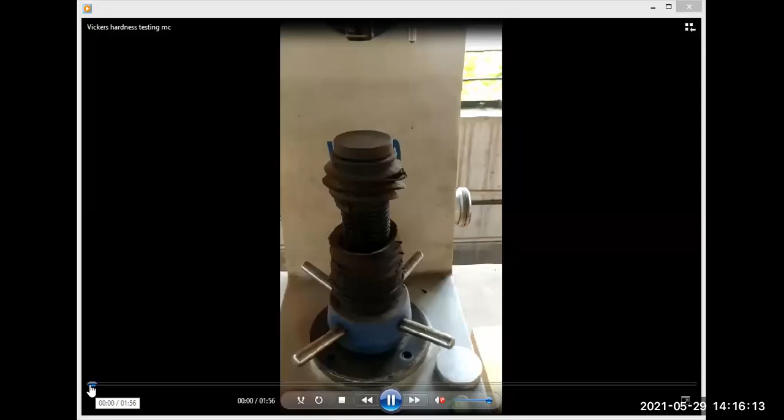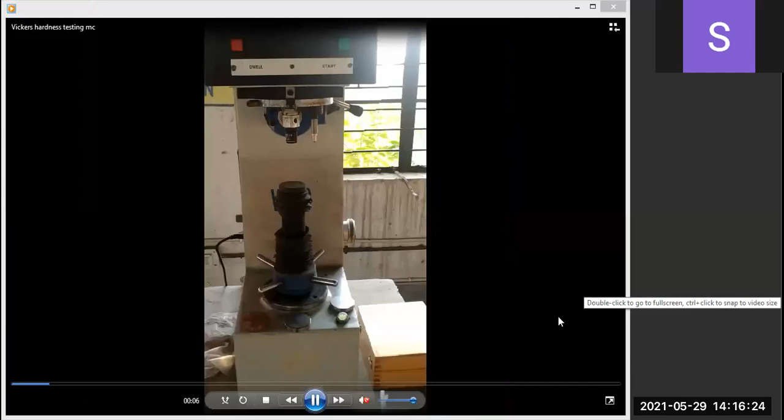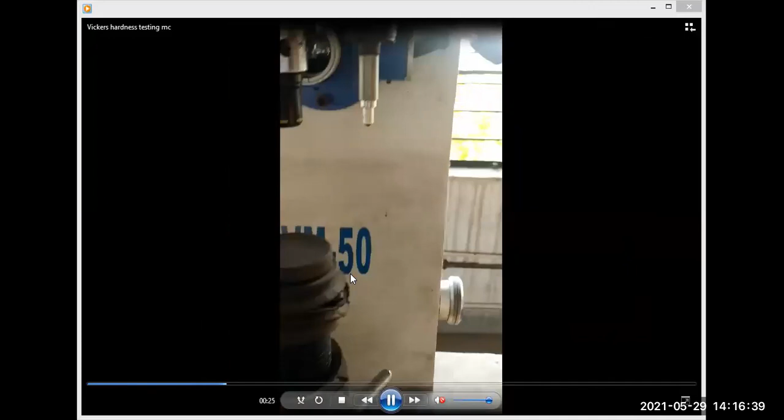Now this is our Vicker's hardness testing machine. There is a lot of similarity with the other Rockwell and Brinell hardness testing machines. Here we have the same screw jack system for lifting up and down of the platform, and this is the platform where you are supposed to keep your workpiece for hardness testing.

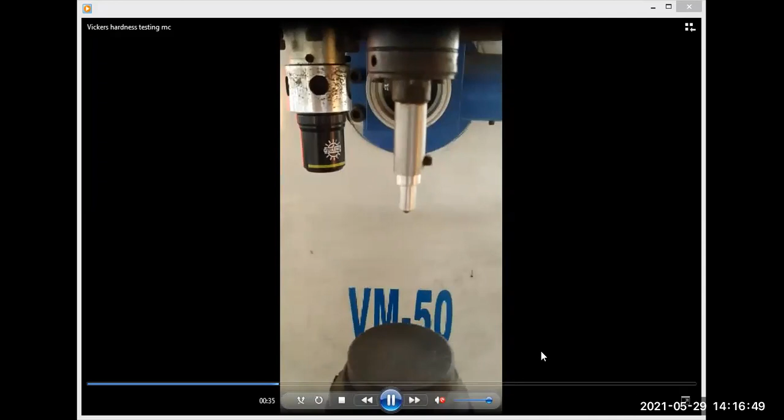Now there are other equipment here. There is a magnifying glass here, which makes 10 times magnification. And there is another magnifying glass inside the machine which totally magnifies the impression and shows it on the table itself.

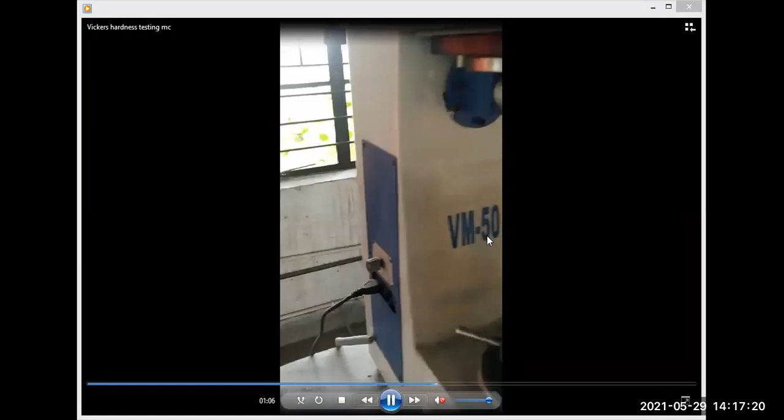The indenters are fixed here in the right side plunger, and it can be moved by a clockwise rotation so the indenter can be brought over the workpiece. This is a time setting device which sets the time of engagement of the indenter inside the work. This is the on/off switch, and this is the cable plug, because it is a power-driven machine.

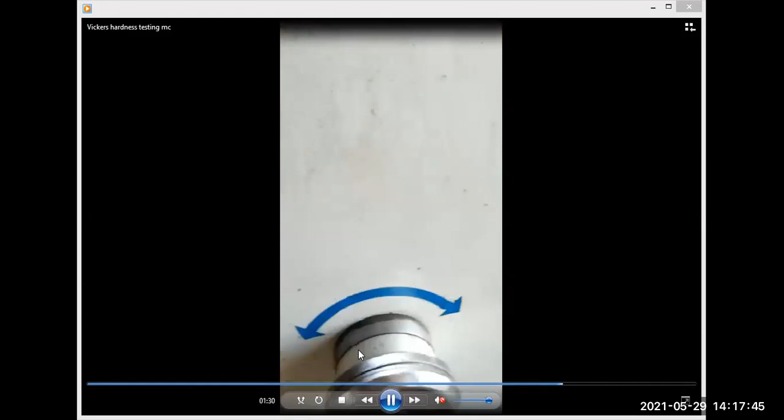On this side we have the load adjustment knob. Here we can start from load 5 kg, next 10, 20, 30, and 50 kg. So 5 to 50 kg are the different loads we can set on the Vicker's hardness testing machine.

Let us show it again. This is the platform over which we will place our workpiece. This is the screw jack system. By rotating this handle clockwise and anti-clockwise, you can lift the platform. If you rotate in the anti-clockwise direction, the platform goes up, and it will go down when you rotate in the clockwise direction.

This is supposed to be covered by rubber bellows to protect it from dust, but unfortunately it is torn out now. This is the indenter holding device, here an indenter is held and fixed over it.

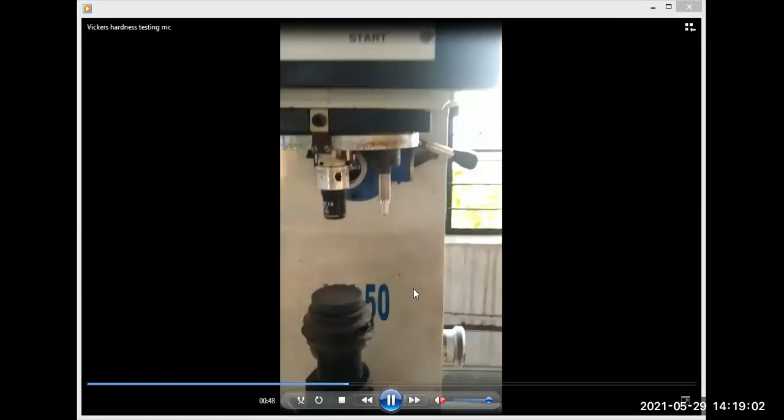This is the magnifying glass which is fixed by rotation and magnifies 1 is to 10 the impression of the work. Inside that window there is another magnifying glass, so altogether it gives 1 is to 100 times magnification of the impression, which is shown in the window and can be measured over the scale kept inside the window.

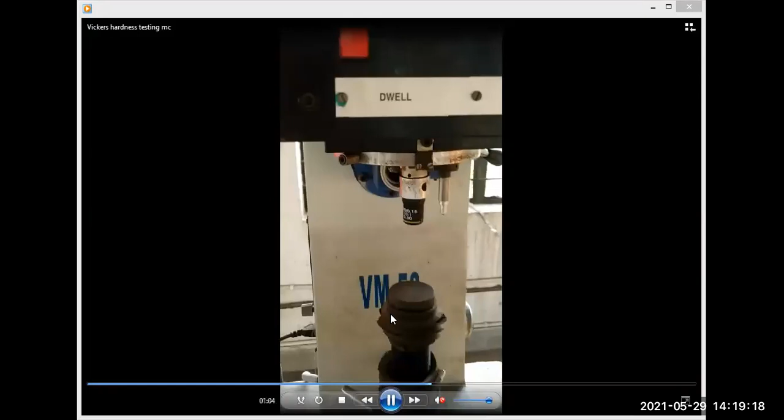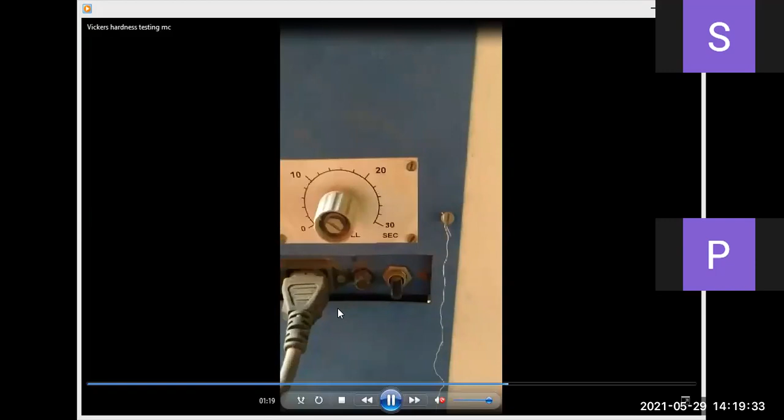On this side we have a time actuating device with a timer for holding the indenter inside the workpiece. This is the on/off switch, and this is the power plug, because this hardness tester is a power driven machine.

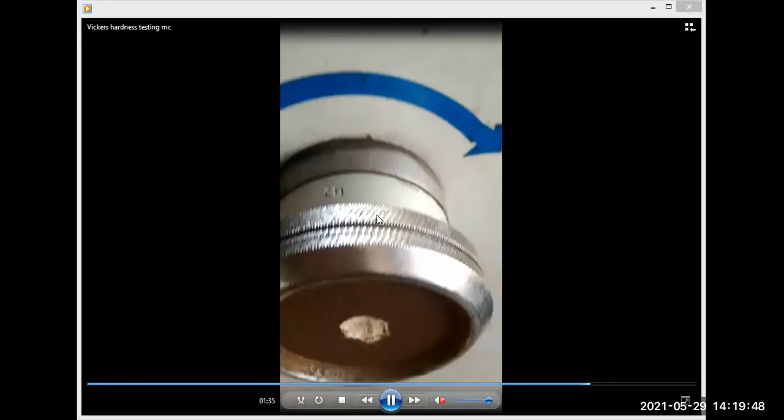On the other side of the machine we have the knob for load actuation. We have around 5 different loads we can set: one is 5 kg, then 10, 20, 30, and altogether 50. These different loads are selected for your experiment, and the job can be set accordingly.

Let us show it again. This is the base and foundation of the machine over which it is situated. It is just fixed and kept on the bed, not actually fixed with the bed itself, and it should be perfectly horizontal with the bed.

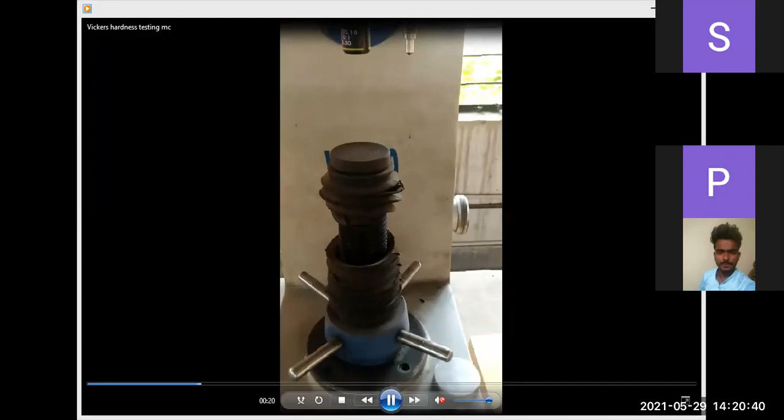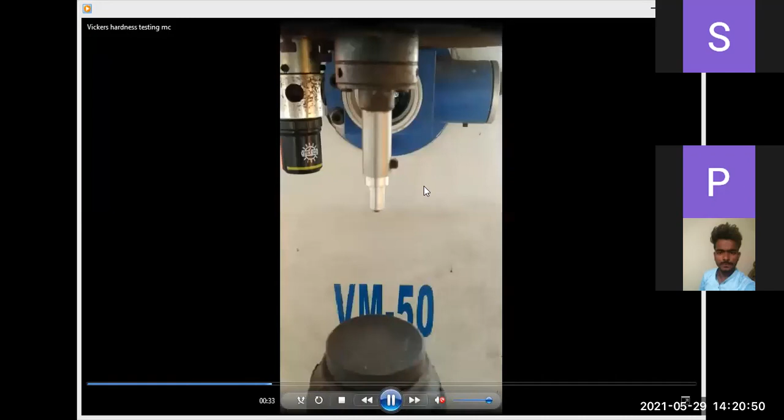This is, as I've told you, the platform lifting device, the screw driver for platform lifting, and in front of it, this is the indenter. It is the only indenter we are using, a diamond tip indenter, and there is one magnifying glass fixed over here. The whole setup is arranged so that by moving the handle, you can move it over the workpiece.

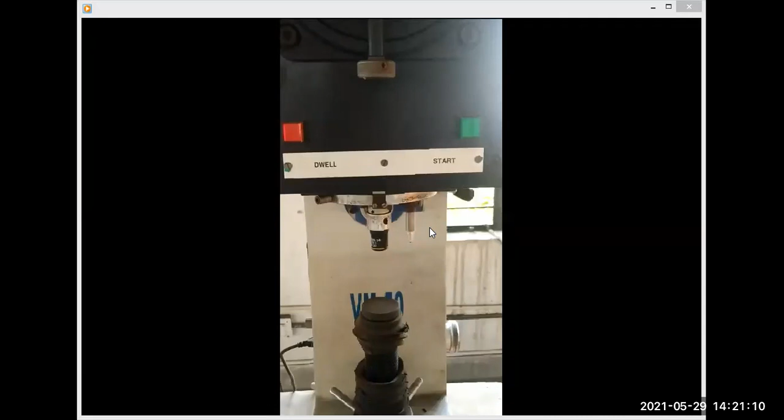Here is the window which is having the impression, shown by my mobile camera, which will show you the size of the impression on a magnified basis of 1:100 magnification.

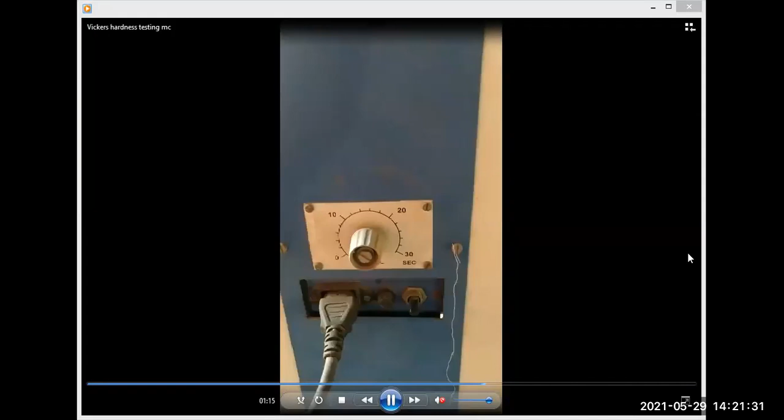And you see at the left side of the machine we have a knob where we can set the time up to which your unit will engage with your workpiece. Up to 30 seconds you can set it here.

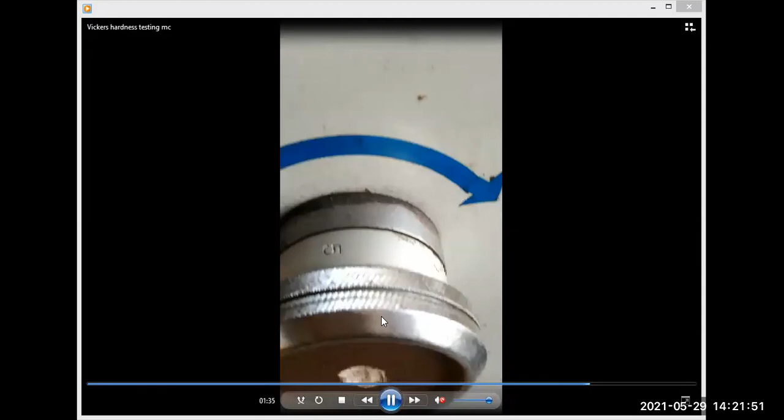This is the machine on/off switch, and this is the power cord. And this is the load actuating device, with 5 different loads we can set: one is 5, by rotation it is 10, 20, 30, and 50. These are the 5 different loads we can set as per our requirement.

I am just moving it in to show you one thing.

Over the rod, these are the jobs we have fixed. This is the workpiece, or test piece, with which we will make the testing here. This one is copper test piece. This is steel, and this is aluminum.

This test piece we have to keep over here and just place it over it, not fixing by any means.

Here, this is the indenter itself. If we rotate this indexing rod device by this rod, the indenter will come in front of the machine, and by actuating the switch, which is not shown here, over the machine, this indenter will engage to the work. After the indentation, the time period of indentation can be fixed with the knob at the left side of the machine, and the amount of load to be applied to the rod is fixed over the knob on the right, which has 5 different loads which we have to select and apply.

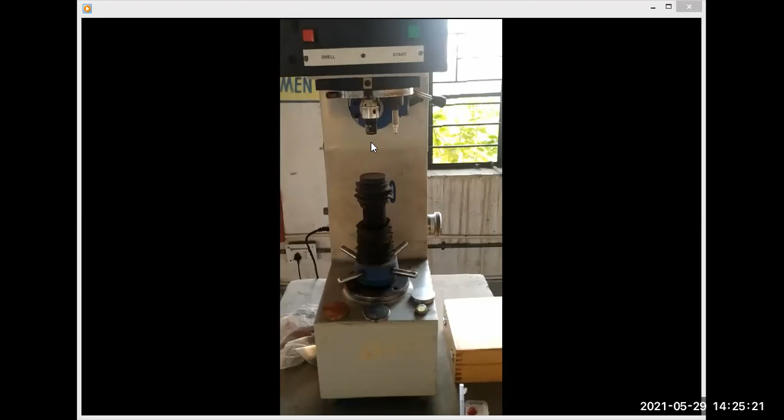This is done because if we engage the material too much to the indenter, then after the job is released, the indenter may draw the material with itself during this movement. So you will keep a minimum clearance between the indenter and the workpiece itself. Just showing you again.

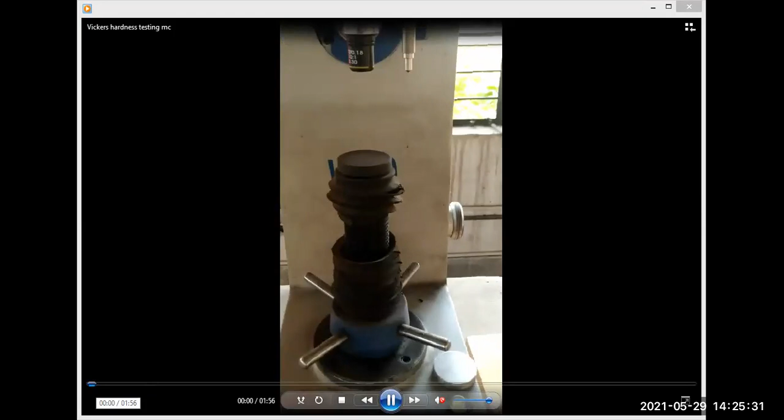And at the beginning, this is the position where it is more readily visible. This is the green switch. If we switch it on, the machine will start. This indenter will engage with the workpiece itself, and it will remain in engaged position up to the dwell period, which is set on the left side of the machine.

After the dwell period is over, this red light will be off, and the green light will glow, and the indenter will release from the workpiece. Then we will move this chuck downward, rightwards, clockwise, by means of this handle, so that the indenter moves away and the magnifying glass comes directly over the workpiece.

You may require it so that you can slightly move the workpiece, but generally it is not necessary. Or you can lift the workpiece slightly higher or lower to make the focusing better than normal cases. But this is a requirement you can make according to your needs.

There will be these three jobs. Aluminium should be placed here, steel should be placed here and checked, and copper will be placed here and checked. But there is one serious problem here.

How much load you have to apply is not clearly given in the machine, the manual, or anywhere else, because you have to fix it by trial and error method. You may apply higher load to get a better vision of the indent, and you will measure the size of the indent. There is only one indenter available here, that is a diamond pyramid indenter, which will make a rhombus-like impression over the workpiece.

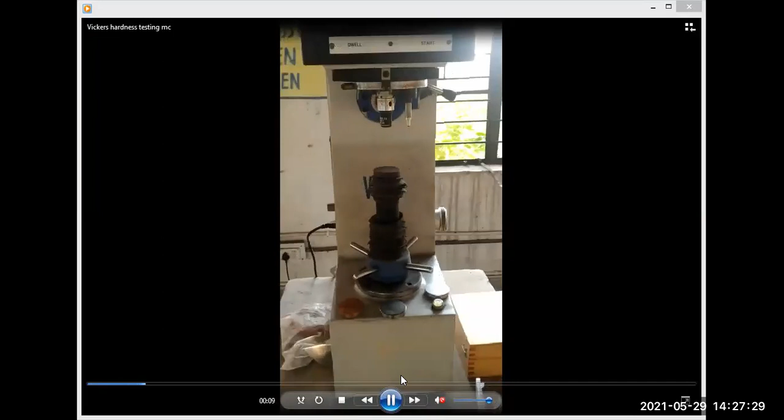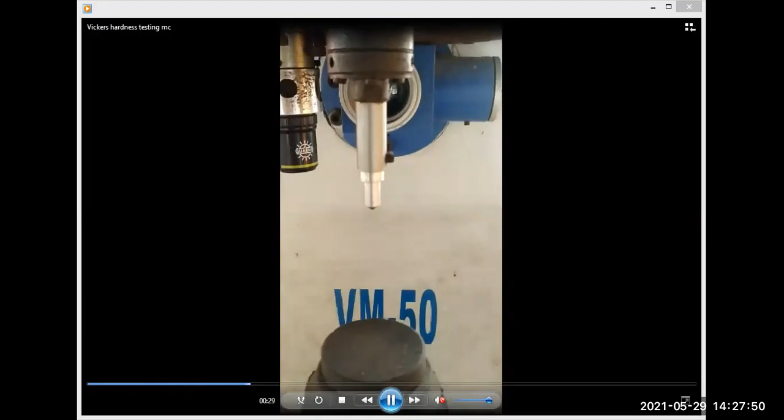And there is a scale here on the workpiece, I am showing you. This is the way we are moving. Next,

this lens is placed over the material. It will give you 1:10 type magnification, and this is the window where the impression of the workpiece will be visible.

These are the scales, straight lines available over it, which will give you a distance of 1 millimeter. There is also a vernier scale here on this side, governed by a vernier kept on the right side of the machine, which is not shown in this diagram.

Let us move on to another part. This is one type of movement switch which controls the movement of the scale from left and right of the machine itself. This will set the longer lines on one side of the impression and take the reading from the other side.

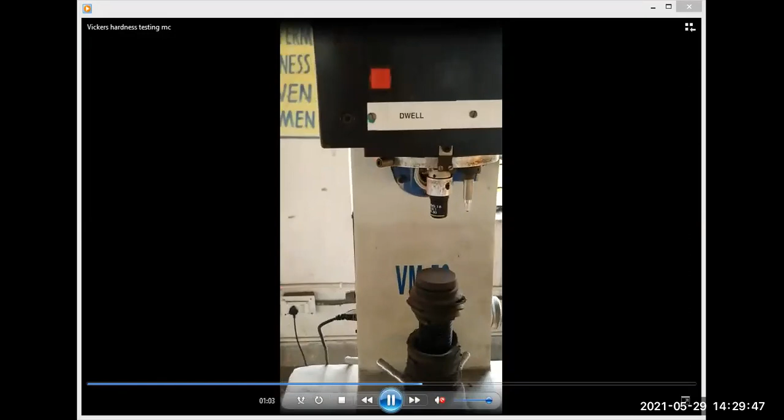This is the dwell period machine, and this is the scale over which you can set the dwell period. A maximum of 30 seconds can be set over it, but generally we do it around 20 to 25 seconds. This means the indenter will be engaged in the workpiece for that duration, giving you a correct and specific impression of the workpiece itself.

And this is the power cord. It is a power driven machine. This is the machine on-off switch, and there is a device where you can house the fuse.

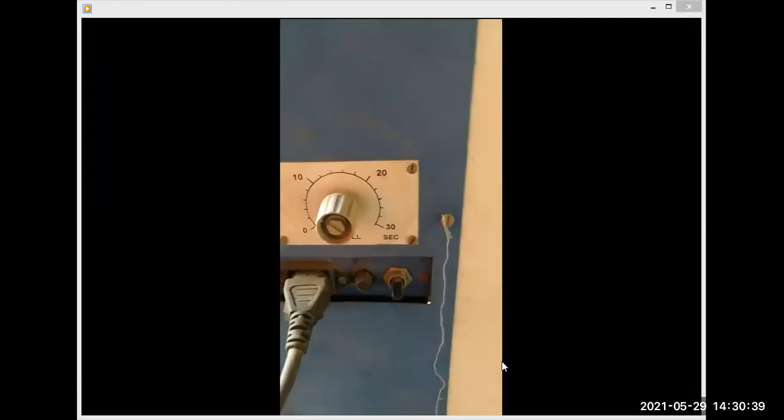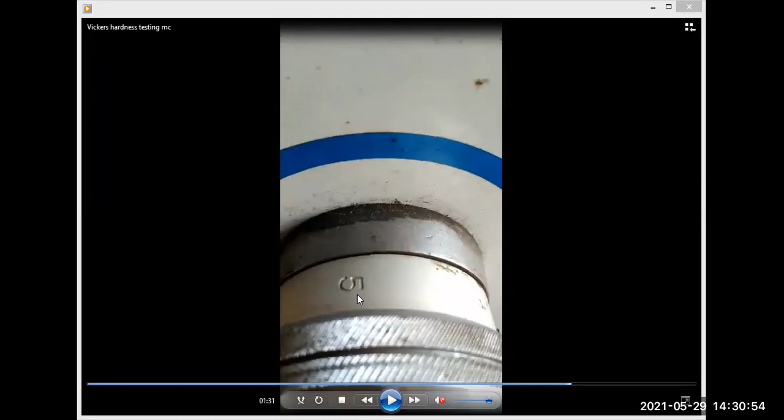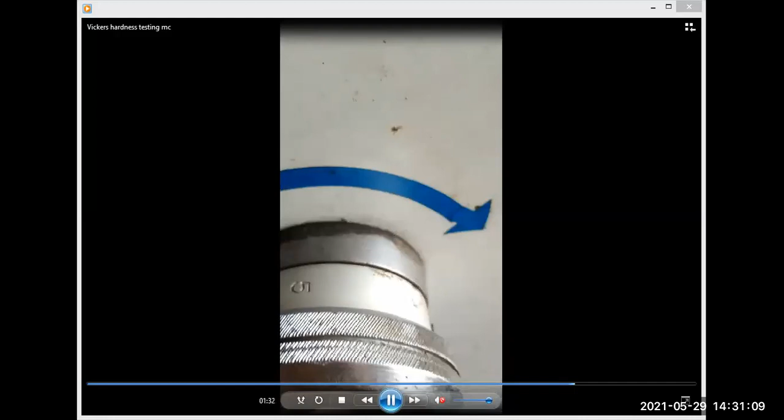This is the knob where we are actuating the load itself. You see, there is a load number equal to 5 given here, and there will be a position above this—the line is not clearly visible—up to which if you press the first 5, it will give you the indenter load equal to 5 itself. Next, you have to address the indenter accordingly.

After the load, if you move it, it will give you 10, then 20, again 30, and again if you move it, the maximum is 50. This is given here, and there is a line here up to which you have to set these weights itself.

Okay, let us go to the theory of the machine itself.

This is the manual which I have given you in third year on the Vickers hardness testing machine itself. I hope you still possess it, or if not, I will give it to you afterwards. The machine is called the Vickers hardness testing machine, model VM50. It is a motorized or power driven hardness tester. While both the Brinell and Rockwell machines don't require any power and are only manually operated and manually started and stopped, here we have limited manual operation, but most importantly, the indenting operation is done by power itself.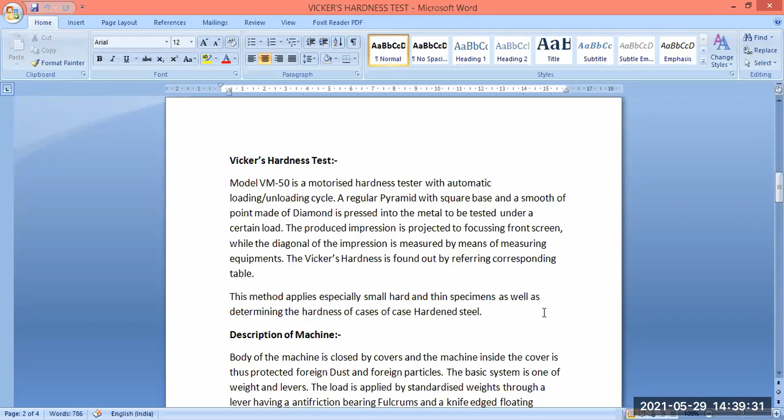Now, what is the description of the machine that I've shown you? I've just given you the impression. The body of the machine is closed by a cover — we have seen that the machine is totally closed. What is inside the machine is not visible to us.

Inside the machine, there is a set of loads which can be applied one after another, or sometimes together, so that you can get a maximum of 50 kg of load at the indenter. This load is created over the indenter by means of a lever mechanism. You can change the load by applying the weights one, two, three, four, five, one after another, and reduce the load by disengaging them one by one.

But you cannot load it directly from 50 to 5 kg, or from 5 to 50 kg. You have to move the knob slowly, either applying the weights one after another, or releasing the effect of one or more weights. You have to go through all the intermediate steps before reaching the final dimension, whether maximum or minimum. You cannot load more than 50 kg, and you cannot load less than 5 kg of working load.

So the body I've just told you about is covered, and the machine is housed over a concrete foundation, which is more or less as high as your knee. The machine is just placed over it, not securely fixed by any other means. You could just place it over it, and the machine is made perfectly horizontal by this level checking gauge.

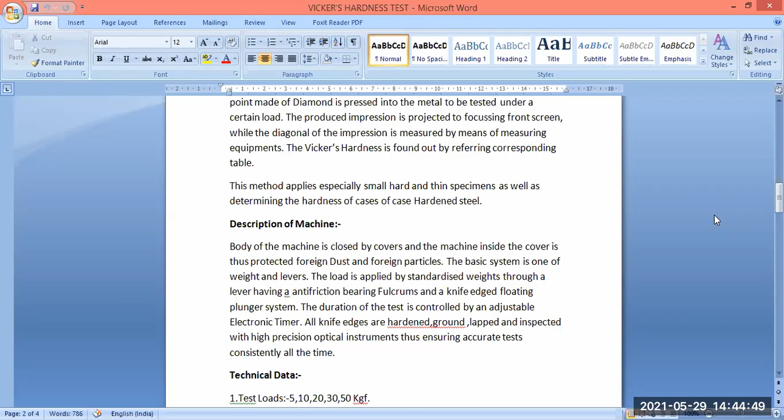Next, I've told you there are 5 weights: 5, 10, 20, 30, and 50 kg. I'm telling you again, you have to select this load according to your experience or the work you are doing. You cannot select 5 to 50 directly, or from 50 to 5 directly. You have to select 10, 20, 30, then go to 50.

So all these stages we are supposed to maintain, so that inside the machine the loads are either applied to the fulcrum or released from the fulcrum by rotating the knob. So you can start from 5 and ultimately finish at 50. By trial and error, you have to find what is the maximum load required for your specimen.

There, what is the magnification of the optical measuring device? There is a lens in front that gives 1:10, and again 7 times is measured. There is another magnifying lens inside the machine, which gives 70 times magnification. So a 1 millimeter impression will show as 70 millimeter size.

But what happens, say we have made an impression of a square of 2 millimeter by 2 millimeter side, not more than that. It will multiply by an amount 70 times, meaning 140 millimeter will be the magnified size visible in the front window. So the impression shown there is magnified, and it should be at least 70 times more than the indent itself. So the scales, over the scales...

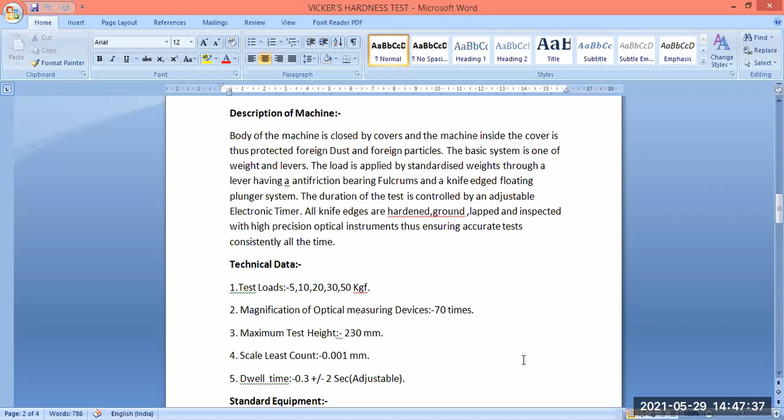Now, what happens here, the dwell period, I have told you, minimum is 0.3 plus minus 2 seconds, but it is not exactly right because I have increased it up to 20 seconds, not exactly 2. So 0.3 will be around 1 second, and maximum is around 25 to 30 seconds. I have doubt about this information itself.

There are the standard test blocks, one number, HV30, 700 of one number itself. The diamond penetrator, we have the indentation or penetration, whatever you like, it will be given as only one.

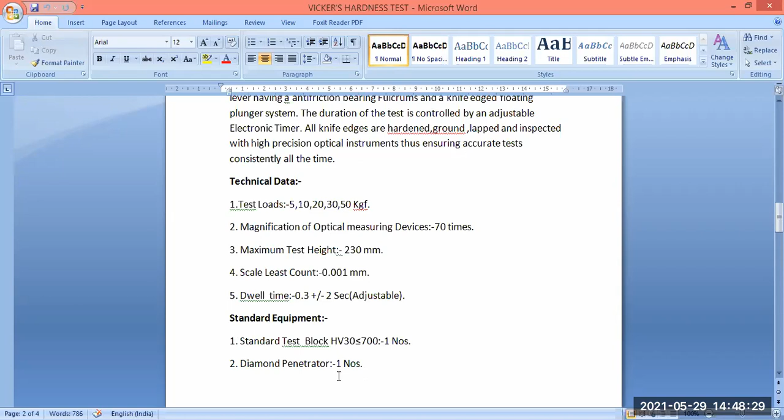As I've told you, the hardness machine is designed to carry out the Vickers hardness test against loads of 50, 30, 20, etc. These weights are selected through an indexing weight selection knob from the outside. By rotating the knob clockwise, the load increases, and it will be released by rotating it in the anti-clockwise direction.

An optical device is given here, shown in front of the table, for viewing the impression from the front screen, with 70 times magnification, which is capable of projecting a 1.2 millimeter impression diameter itself.

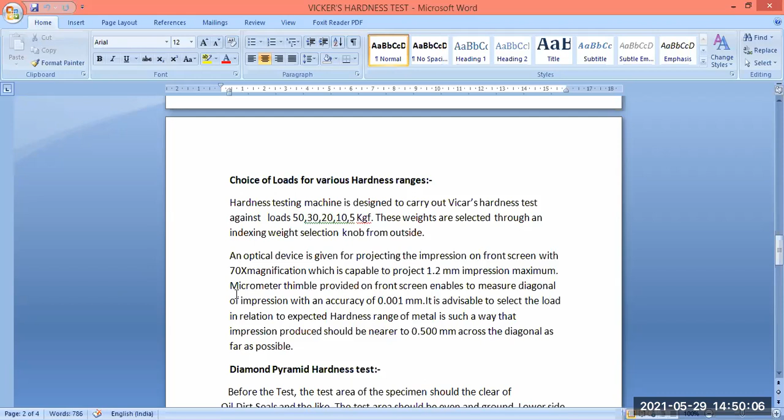What we do here, the micrometer thimble provided on the front screen right side is able to measure the diagonal of the impression with an accuracy of 0.001 millimeter, and it is advised to select the load in relation to the expected hardness range of the metal.

In such a way that the impression produced is near 0.500 millimeter across the diagonal if possible.

So what you have to do is get the impression here, make it clearly visible by adjusting this load carrying platform to a certain extent, based on your own experience or your friend's experience. You just move it up and down to get the perfect impression over the dial itself.

Sometimes, in spite of all your best effort, you cannot keep the workpiece indent just under the magnifying glass. It has moved to a certain extent due to the movement of the indenter, or somehow it is moved to a certain extent.

So you have to manually find out the point which you have indented, then push that point under the microscope so that it can give you a proper and clearer, bigger impression of the indenter itself.

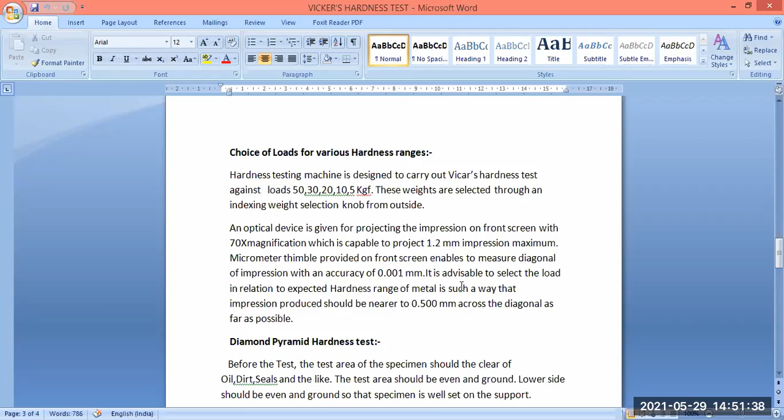The expected impression should be more or less half a millimeter across the diagonal. There is a minimum spatial impression that is measurable here, but not everything down to 0.001 can be measured here. So you have to calculate a slightly bigger indentation over the workpiece itself.

Now, diamond pyramid hardness test. Before the test, the test area of the specimen should be clear of all sort of oil, dirt, silt, and the like, so the impression should not be affected by any sort of rust, oil, or dirt itself.

And you should thoroughly clean it, but not by means of any cleansing agent, but by means of clean paper, clean cloth, or clean jute itself.

Now, the test area should be even and ground. After months of use, the test area may have impressions indented in a lot of places, and you cannot use it then. So you have to make a light surface grinding of the test material to make it perfect for the impression for the machine.

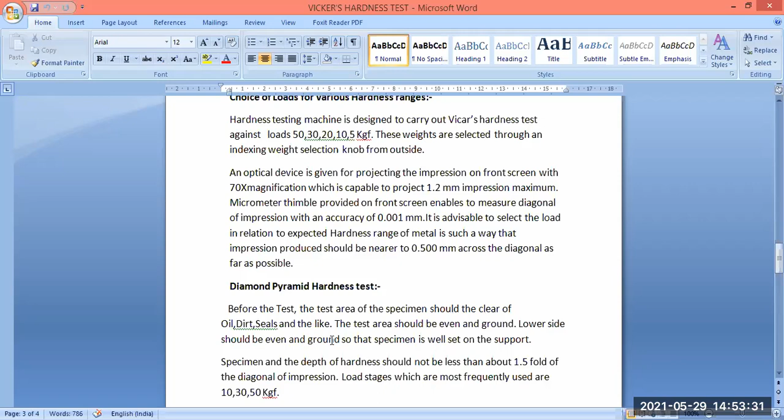What is being said here is the test area should be even, the lower side should be even and ground, so the specimen is set clearly on the support itself. So somewhere this specimen is not perfectly flat.